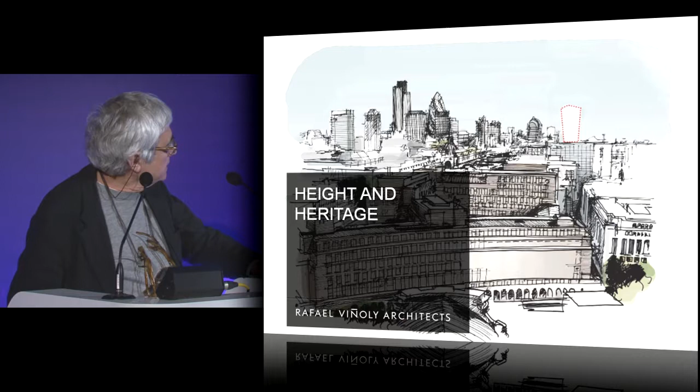The project was the result of a competition to come up with a design. I should say that at that time, the head of the London portfolio, Mike Hussey, came to the office. The presentations were in the office, and we showed him what we had selected as the kind of ideas that we were going to present.

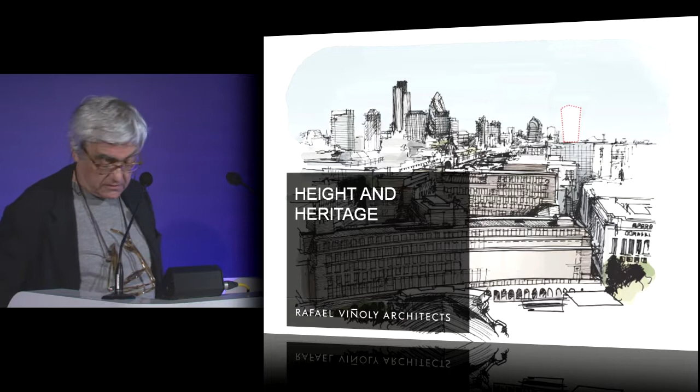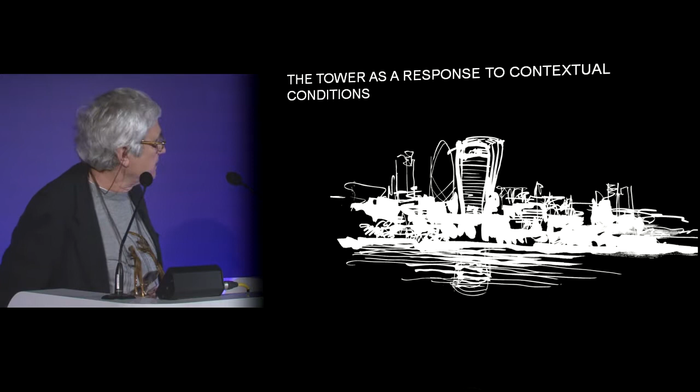I must say, rather timid and to a certain extent also analytical, if you will. He saw a sketch that I had made and a little model that was under the table where we were making a presentation, and he said, 'So what is that?' And I said, 'Well, I don't think you want to do this, but maybe you want to take a look at it.' And he caught from the beginning the idea.

Pretty much in the sense of what we were discussing before, the idea that in the process of occupying the skyline, there is a responsibility of the buildings to return something in exchange for it. The idea was in a site which was in the periphery or on the edge of the so-called cluster, how a building in that position could actually relate both to the north, to the urban design form that Peter Rees had envisioned, and at the same time have a direct connection to the river and a presence that could actually be self-justified.

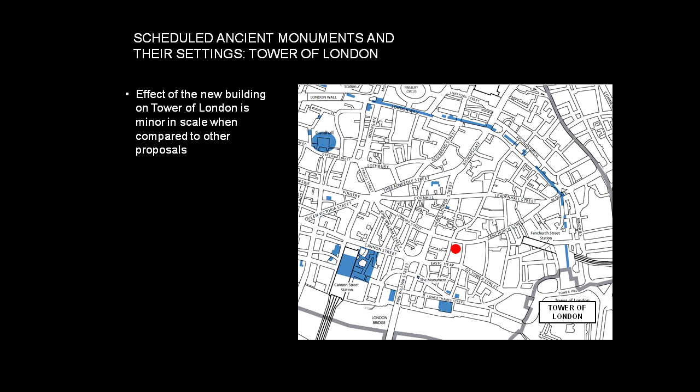Many people know these images, but these are the heritage and monuments that are in particular very much connected to the notion of how the planning is evaluated of the building, the consent is evaluated.

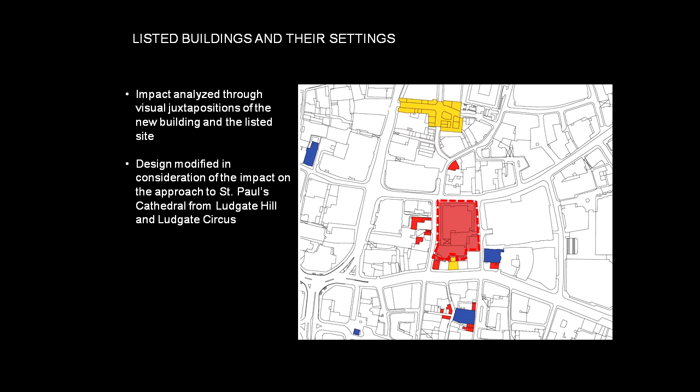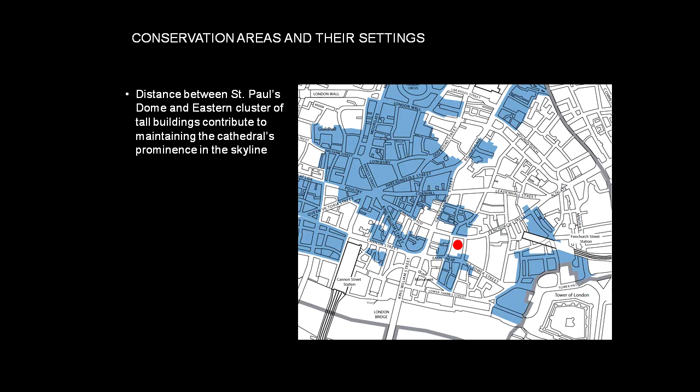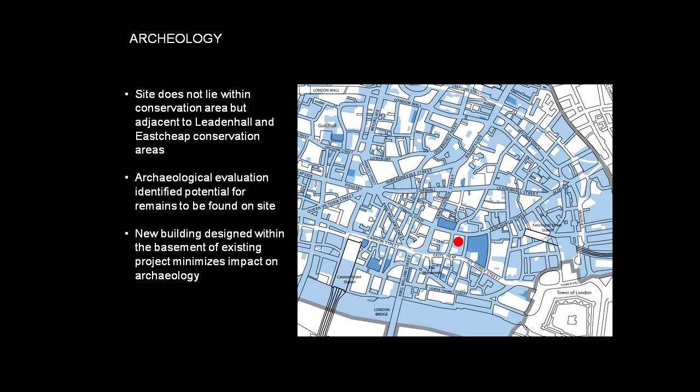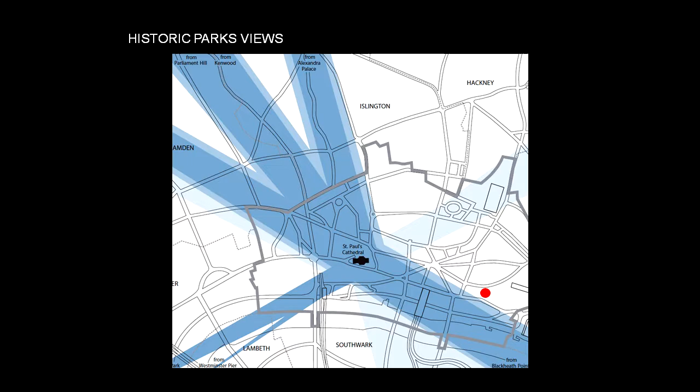I also should say that I enjoyed enormously the difficult and sometimes torturous process of having to present an innumerable number of times, and also to people that, while probably not being 100% into the subject matter in terms of the design implications of every form that we make, their concern was legitimate and to a certain extent also important to recover all of this into a portfolio of suggestions that actually shape the building together with the very initial ideas.

These constraints that I just went through became perhaps even more heightened by a piece of material that was produced by English Heritage, which was a kind of datum determination of the views from the Tower of London.

And even though the building from the very beginning had this important subject to meet, which is its relationship to the context, at least in my view, it really came from this idea that one could actually treat the building not necessarily as a tall structure.

I remember many years ago in another talk I participated in, I mentioned to Peter that I thought most buildings in this town weren't really tall buildings. I come from New York, actually lived there 35 years, and for me height and density is a matter of personal choice. So the decision driven by financial or political issues of densifying the city is, on top of being inevitable, probably the new era of how that could evolve.

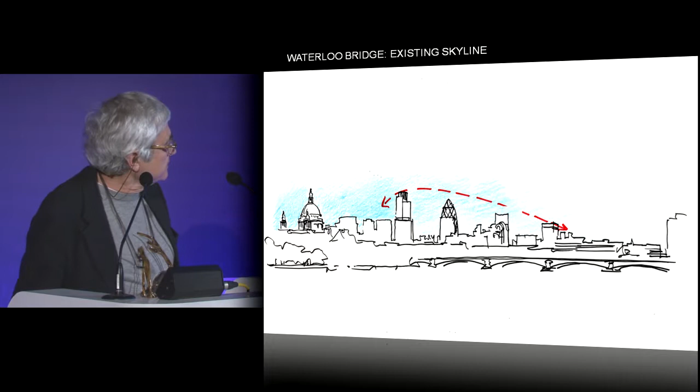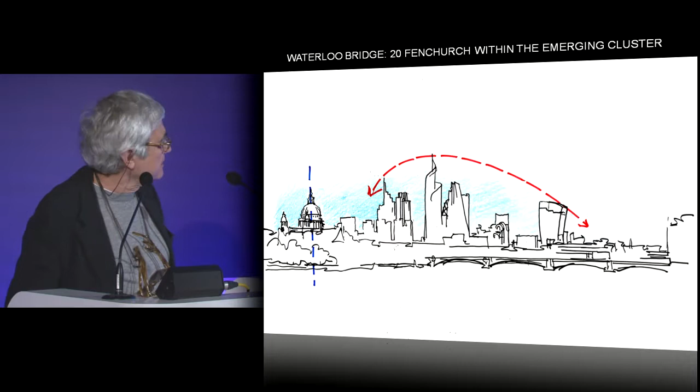These are images that I drew precisely for the inquiry, to explain to the people and the lawyers the kind of gestures that the building made to really claim its participation in the cluster.

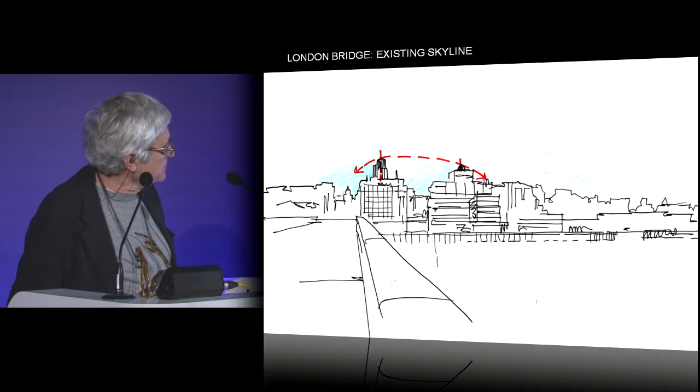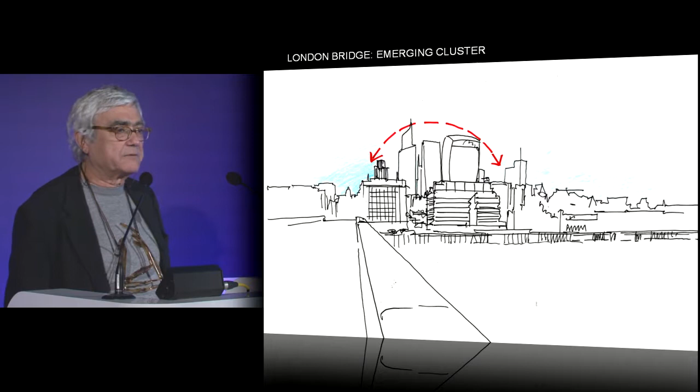The second aspect of this, and perhaps the most interesting, is that these decisions on an urban design scale are usually misunderstood because they either lack graphic information or have too much of it. Essentially it's a process that deals with time, and I think the public in general has a little bit of difficulty understanding how these things will evolve in the future.

I know the building looks today a little bit isolated in its position. I think that the dynamic and energetic life in London will actually make it become integrated.

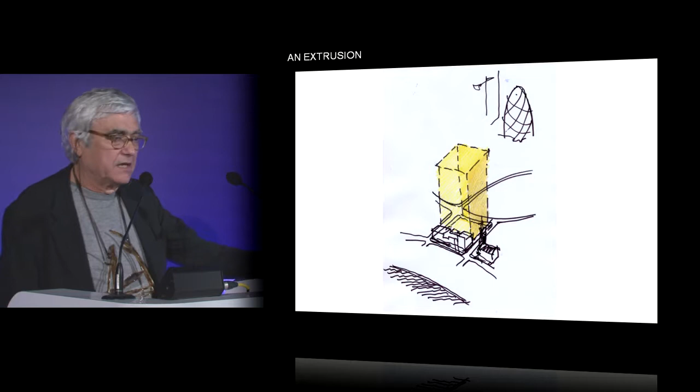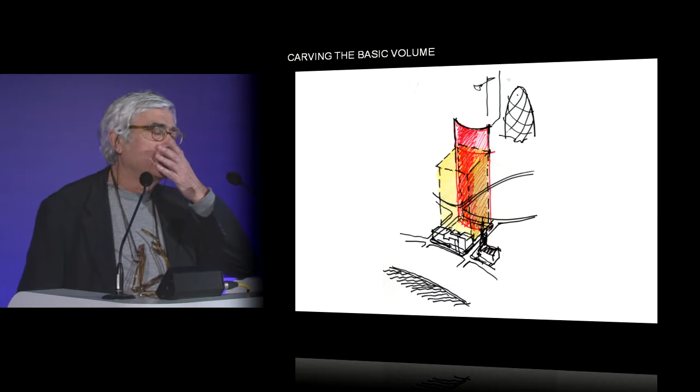These are a series of diagrams of the kinds of things we could have done—a regular extrusion with whatever kind of detailing one could think of, and how that thing could be shaped in relationship to the street pattern and the views, which are really always in a particular non-frontal perspective.

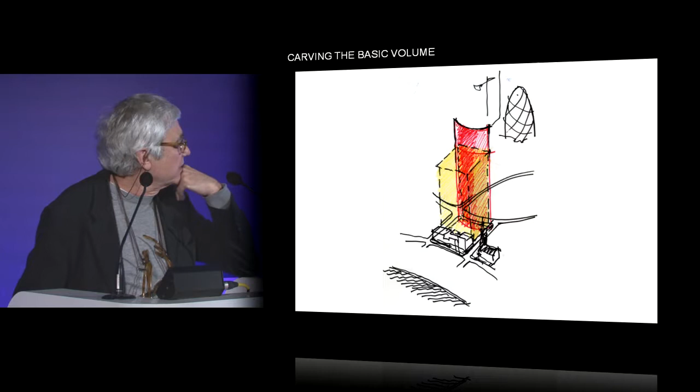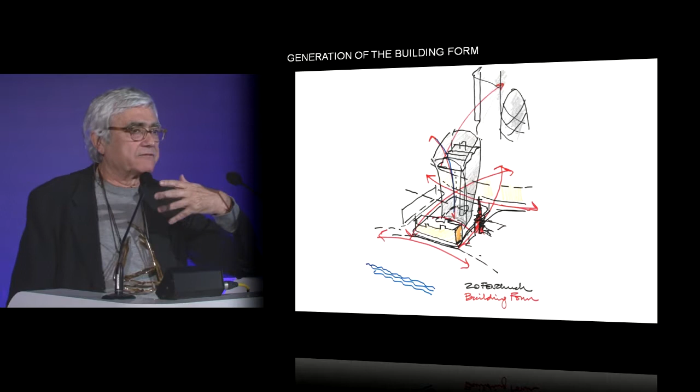It's one of the most interesting aspects of the city—the fact that one encounters buildings that are familiar in and of themselves from angles that are unexpected, and from perspectives that are sort of encumbered by other buildings. This defines the subject of how contrast could actually become a plus in the discussion of how the city adopts a building typology like the one we're discussing here.

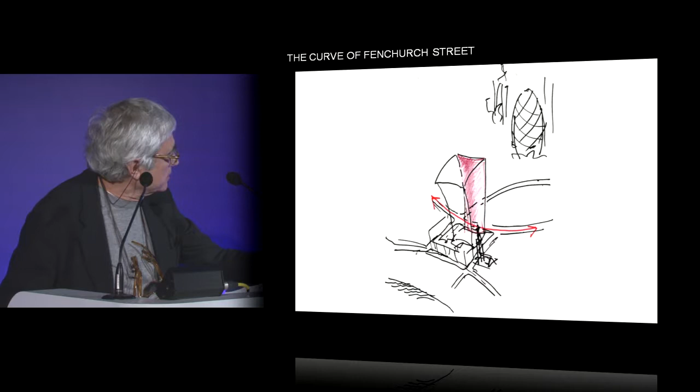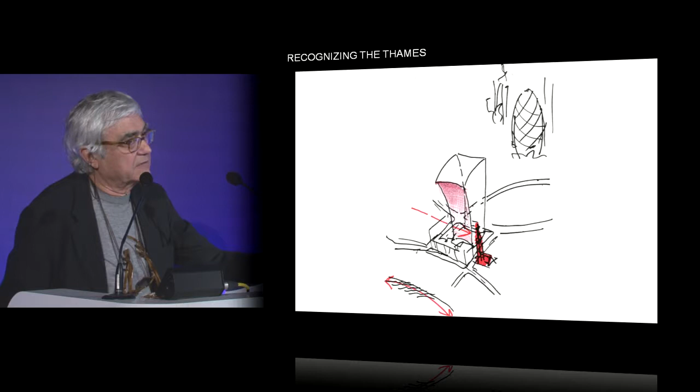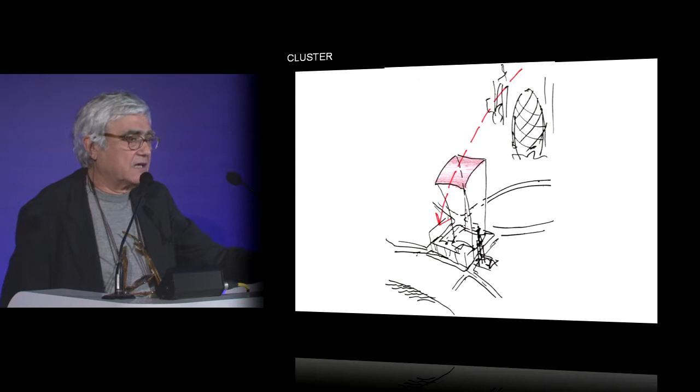This series of diagrams explains what I think is a number of very simple and really completely unique moves, together with the fact that in the process of generating this idea, the driving force was to free up as much as we could the public realm on the pedestrian level, and return to the city an area equal to the size of the site, in a position that actually could not be considered exclusive.

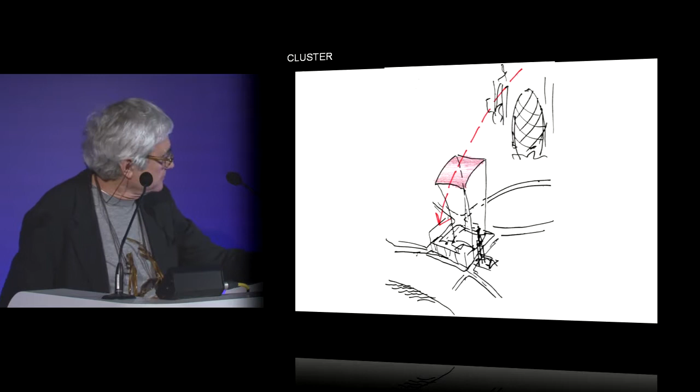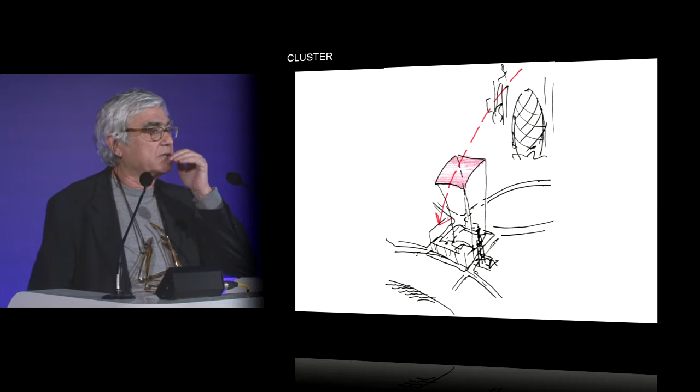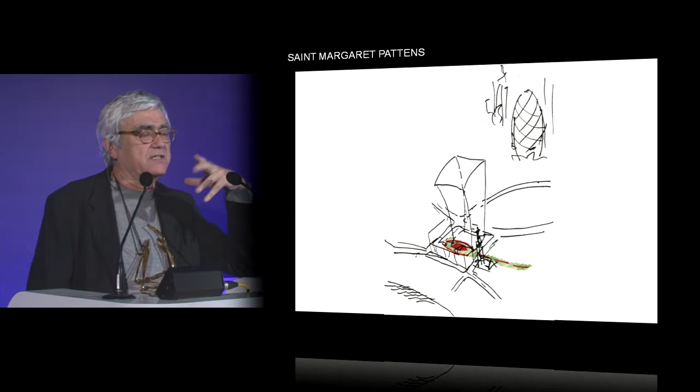So for Tony's question, the building is public at the top. I consider that a unique and significant contribution to the public realm. It has permanent access 24/7 to the top. It will be run, and there are going to be, I'm sure, important security issues added to this condition.

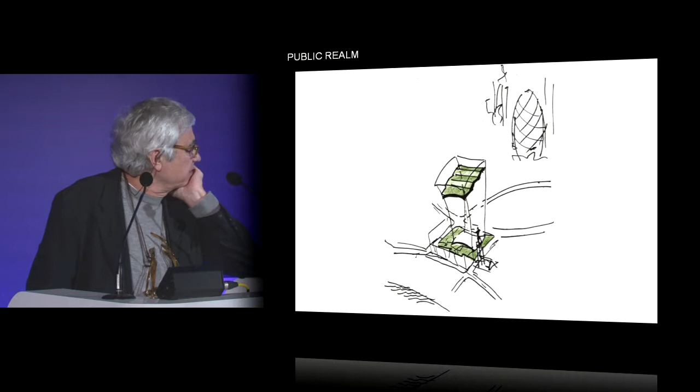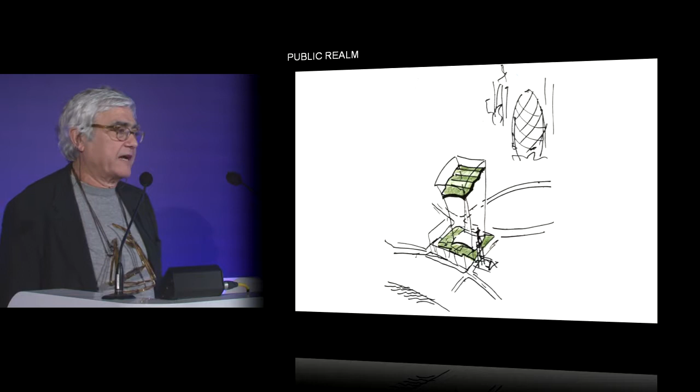But in the agreement with the city, this is a public park, and perhaps the project is better explained in this diagram. You encounter a site, you take advantage of a form that, as somebody said just recently, appears to be a simple diagram of real estate values, and I see no reason why this thing should be an insult.

If you have the kind of technological tools that we have today—and I don't claim that this is a unique and permanent solution for anything, even though in many cases it has been taken after the fact, after we started and published the project—

But the notion that you could actually invert the essential typology of a building that goes thin at the top, which is generated essentially by the lateral forces and the wind effect on the mass—buildings historically based on a certain efficiency of how to control those movements—could be inverted, so that somehow the biggest part could actually be at the top and not at the bottom.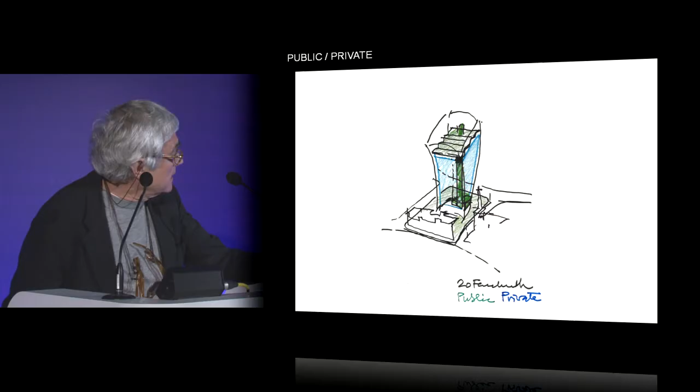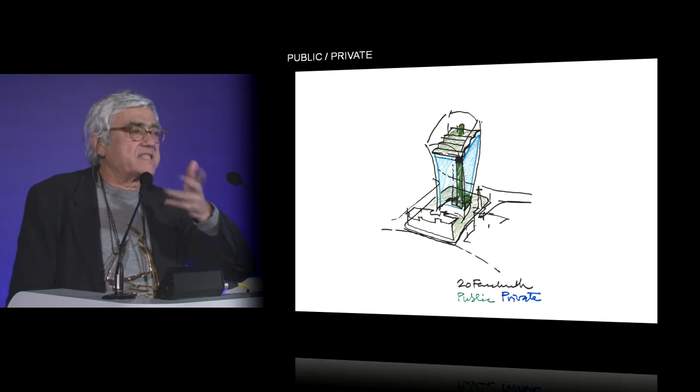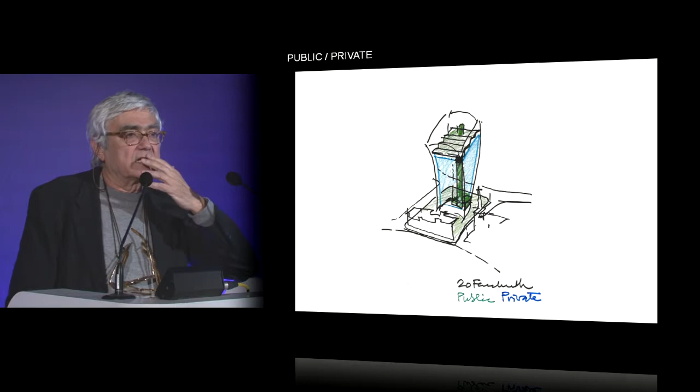The decision, once you take that notion in place—and this is not a quid pro quo, but essentially an integral part of the idea—is the fact that you could recover that top as something that is not a ticketed experience, or a space that is exclusive in terms of its use, but rather a public realm, as valid as the site on grade. That is what I put my money on in terms of how that thing may change the experience of visiting London.

I am sure the Shard has spectacular views. I can see it across the river every day. But I still think there is some difference, a welcome difference, in the fact that you could actually use this room for many more things other than just visiting a spectacular viewing position. This is not an outlook, it's a function room—a place where you can go have lunch, look at the city from the top, and give parties and so on.

The images are CGIs. Although some of them could have been photographed, because the building is in full force of construction.

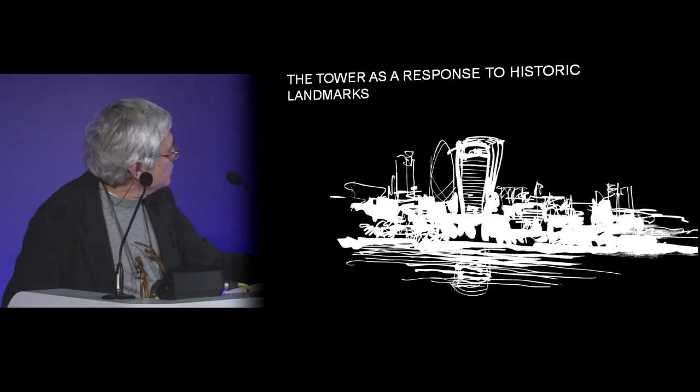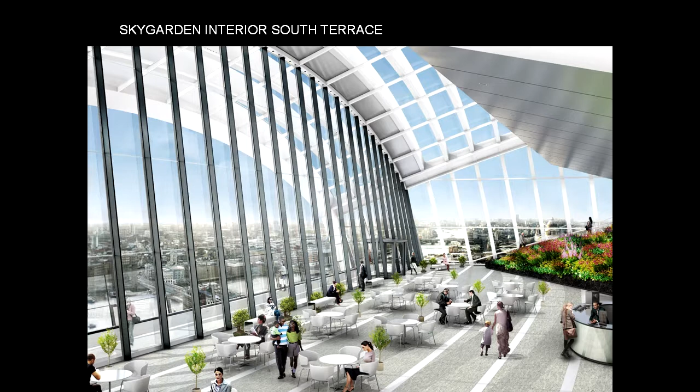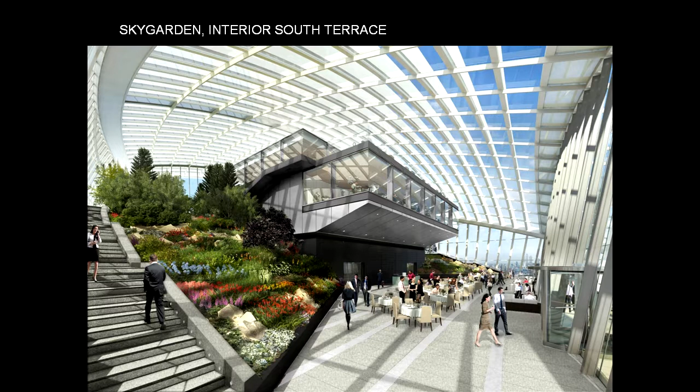But as I say, at the end of the day, the most important part of the project is this space, which is approximately 4,000 square meters. It has several levels that contain only one for-profit restaurant in the center, but it has a garden with a series of passages where, in this kind of stadium organization, you can look at the views from different perspectives.

This is in relationship to this double effect of looking at the cluster also as an example of how the city has reinvigorated itself, producing one of the most, in my mind, remarkable contributions to the history of architecture in recent times.

It isn't a simple thing to deal with heritage in elevation. I do believe there is a way through which design can contribute, without stretching the concept of traditional historic buildings in elevation, but rather recognizing that these are objects of a unique specialty, and nevertheless could claim to be totally site-specific—completely of the town, of that particular site—integrated and contributing to one of the most important issues that the traditional historic city has as a drawback in today's urban life: the lack of the degrees of density required to sustain the demand and business of a city, not just in financial or economic terms, but also as a culture, as a product of human activity.